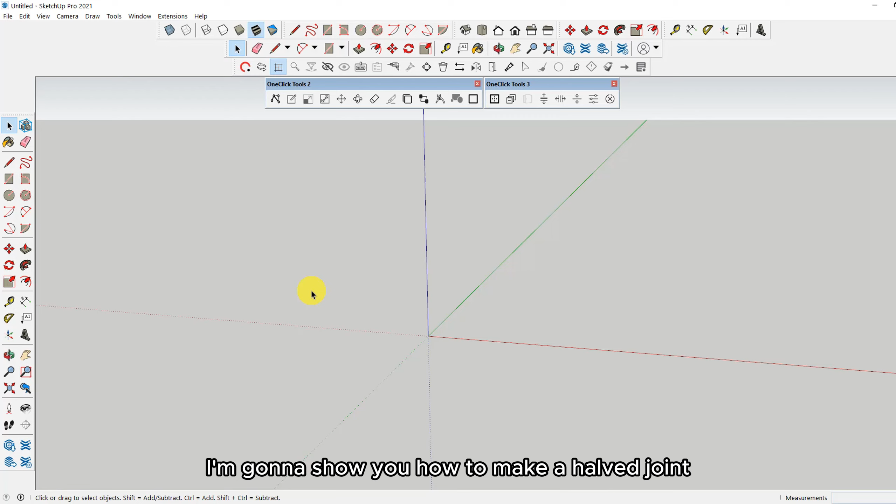Firstly, we can use a halved joint from the library. Select the logo icon, and from the library, bring out the halved joint.

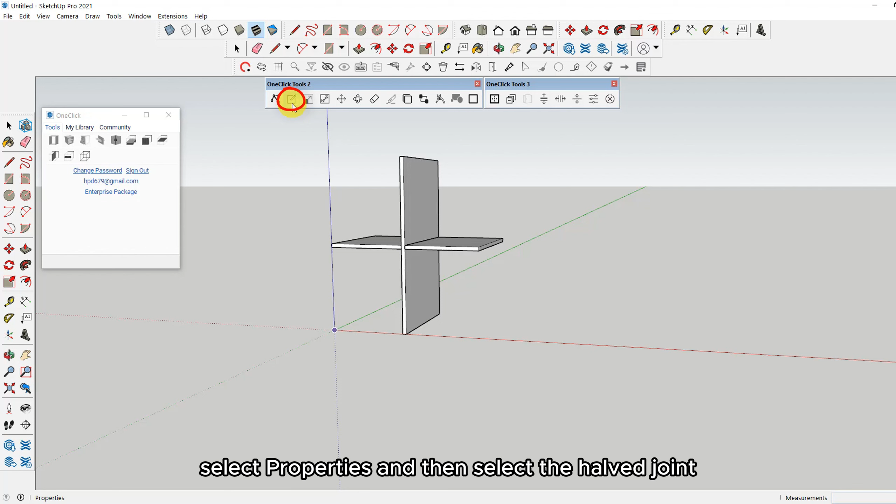This is a component and we can customize it. Select Properties, then select the halved joint. We can choose whether the vertical panel is shown or the horizontal panel.

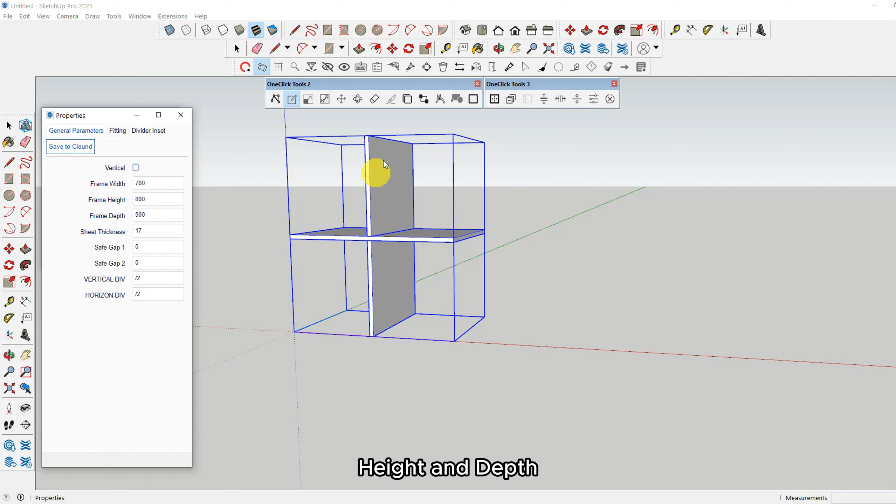Tick or untick the checkbox. Frame width, height, and depth are the dimensions of the frame. For example, frame width 600, frame height 600.

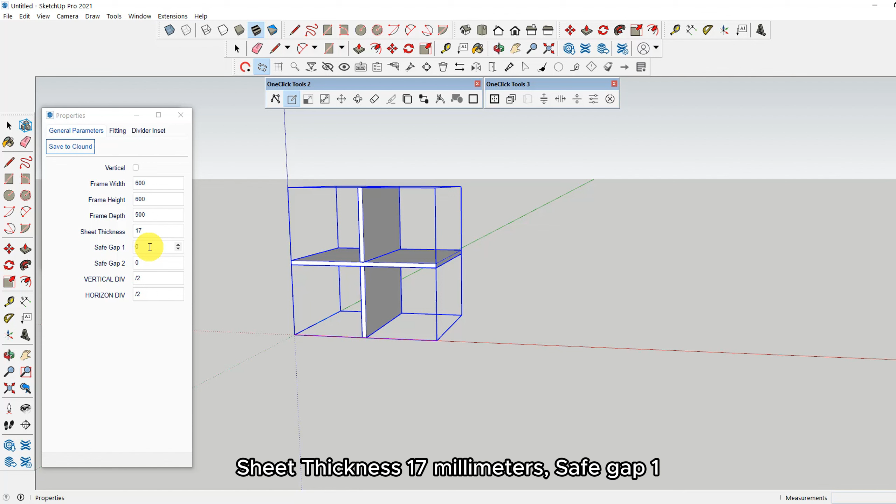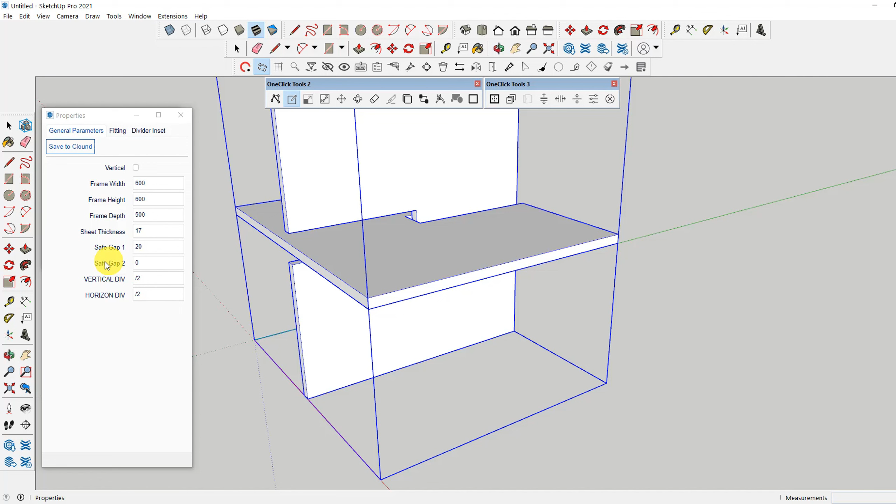Sheet thickness 17 mm, safe gap I'm gonna use 20 mm as a demonstration so that we can see it clearly. So this distance is 20, and this distance is 20. And the safe gap 2, 20. It's this gap between the two panels.

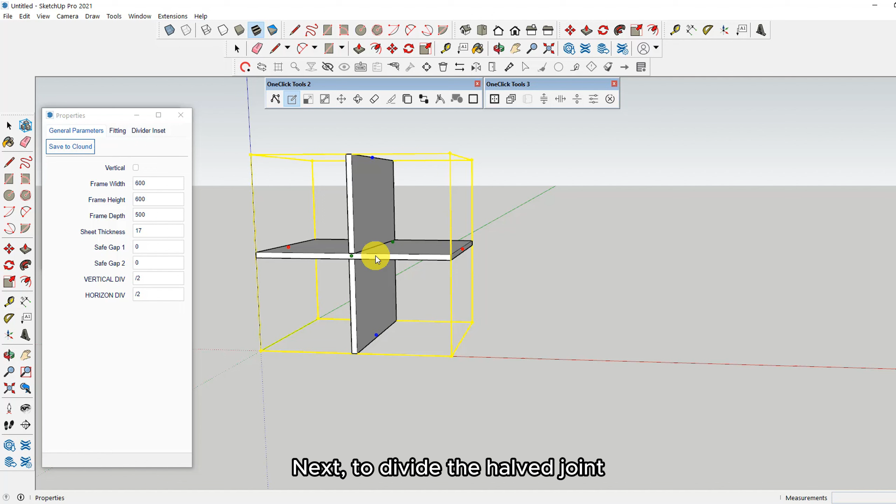Next, to divide the halved joint, there are two ways. First, a slash and the number of equal parts. Or in the box, we can enter the dimensions.

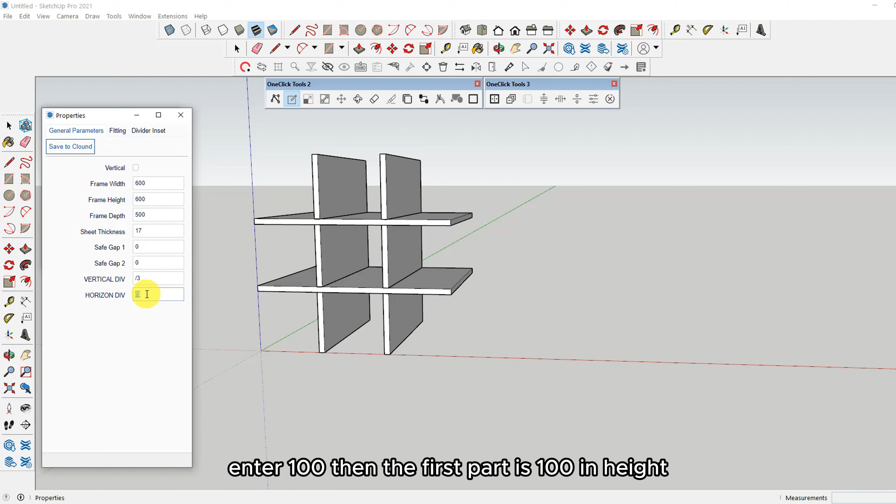For example, for horizontal division, enter 100, then the first part is 100 in height. To have more divisions, separate them with a comma, 200 for example. And it's going to be divided from bottom up.

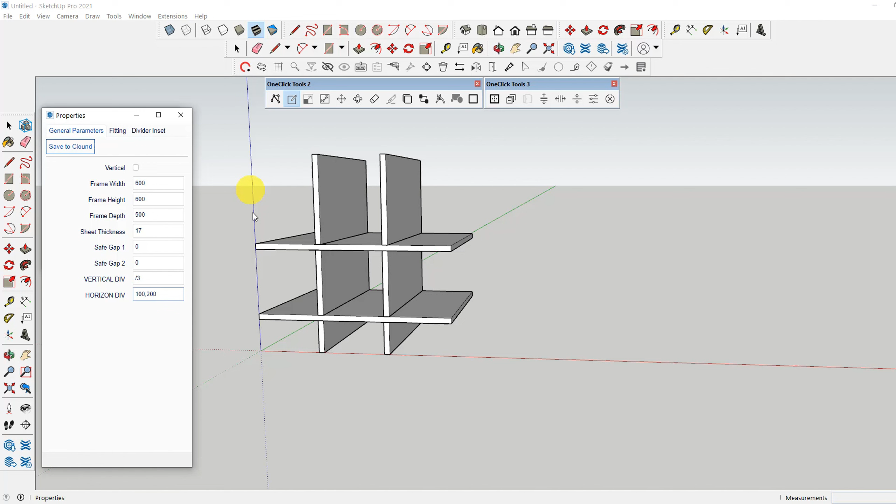Fitting: to do edge banding, select the type and take Generate Fitting.

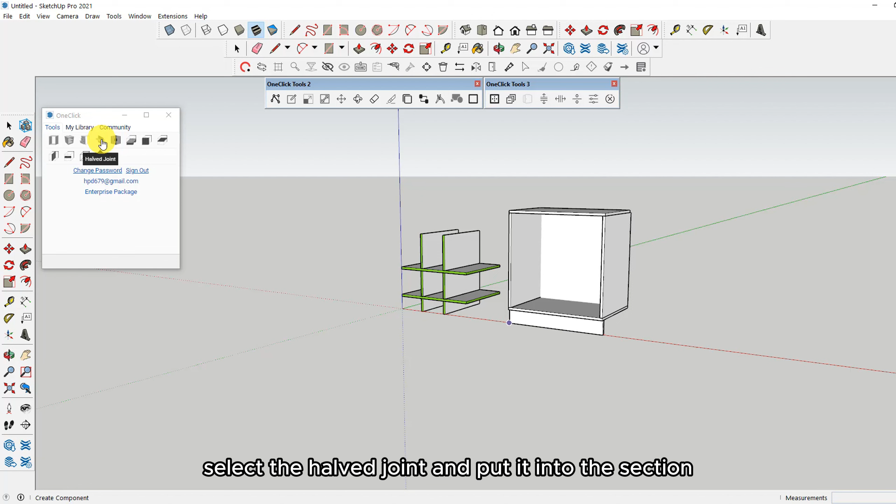Besides, we can also add a halved joint into another frame. Select the halved joint and put it into the section. When it shows yellow like this, left click and it will fit in.

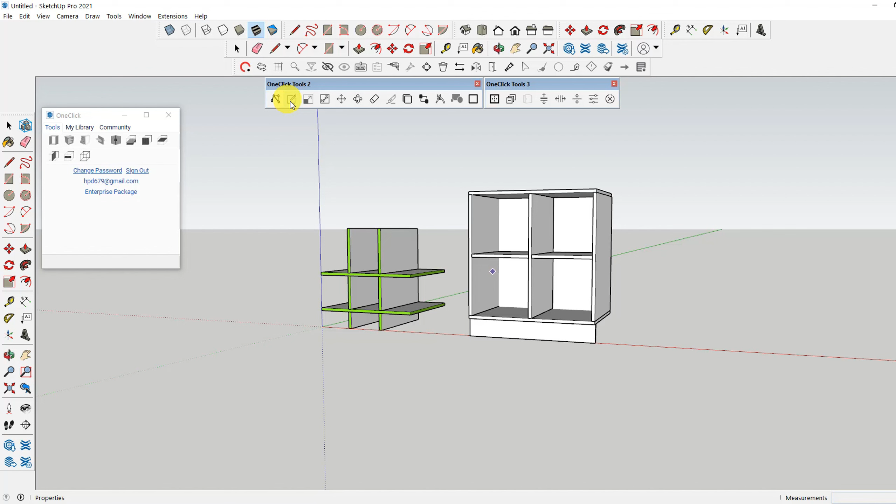And we can also customize the halved joint just like the other one. Divider inset: type in the inset values, for example 17.

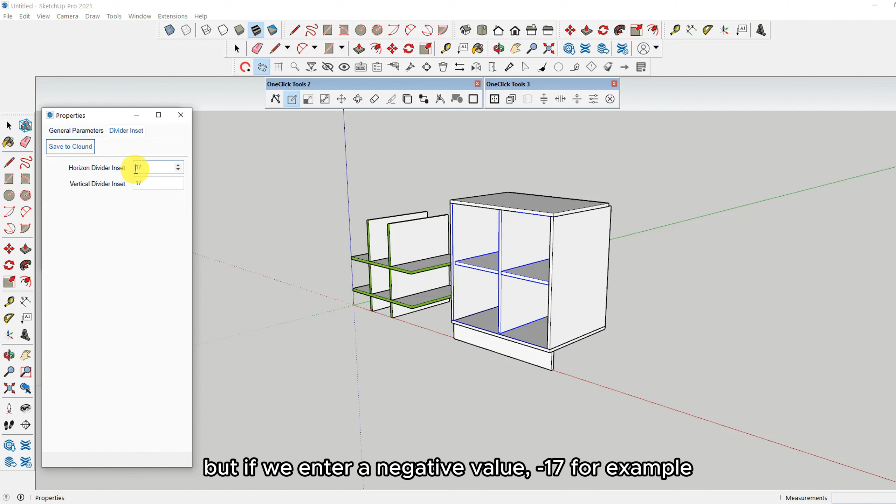Then the dividers are going to come inward. But if we enter a negative value, minus 17 for example, then it's gonna go outward like this.

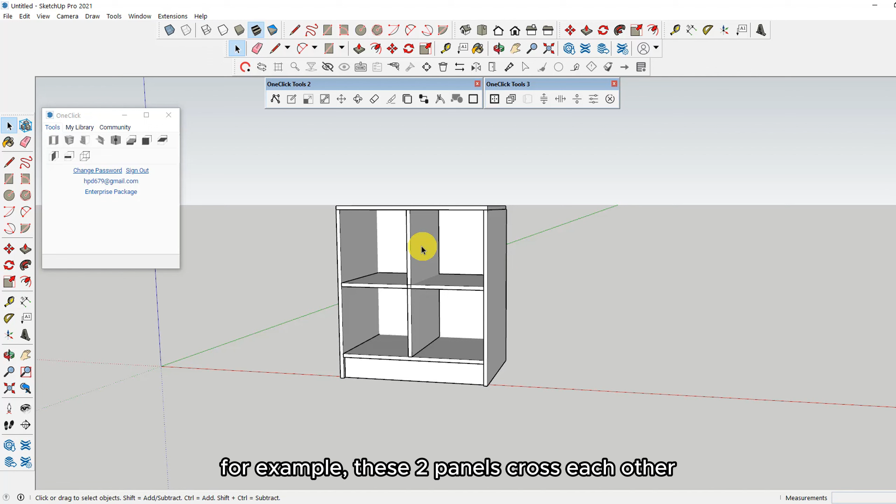Next, we can also create a halved joint manually with a tool, the fitting tool. For example, these two panels cross each other. Select the tool, fitting tool, and then in halved joint, select the type, then click on the two panels.

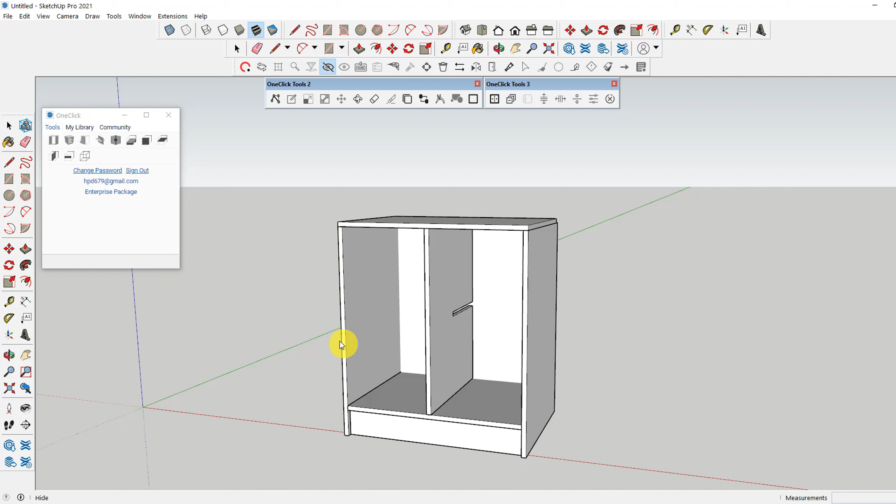So this is how we create a halved joint or use a halved joint from the library. For more tool instructions, see you in the next videos.